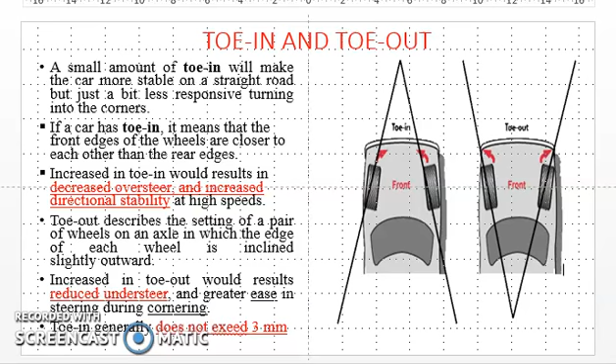In the previous video, we have seen what is caster, what is camber, and we have also seen kingpin inclination. Now we will see what is toe in and toe out. When you are looking from the top of the vehicle, you will find that the front wheels are closer as compared to the rear side of the wheel. Then this type of wheel position is called toe in.

Okay, we will see the definition which is written in the book. The toe in is the amount by which the front wheels are set closer together at the front than at the rear when the vehicle is stationary. Okay, how are you going to calculate this toe in? The outer distance, this distance divided by this distance. Okay, then it is called toe in.

Okay, so a small amount of toe in will make a car more stable on the road, but just a bit less responsive turning into corners, but this toe in will not help when turning a vehicle. Okay, and if the car has toe in, it means that the front edges of the wheels are closer to each other than the rear edges.

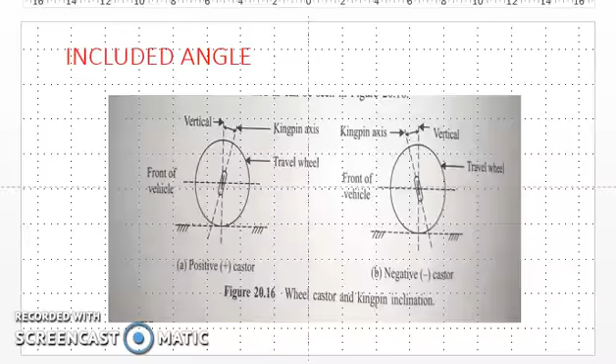This increase in toe out would result in reduced understeer and greater ease in steering during cornering. Okay, means during cornering, toe out will help. Okay, so this is about toe in and toe out. Now, just before going to the next point, once again we will see what we have learned during this lecture.

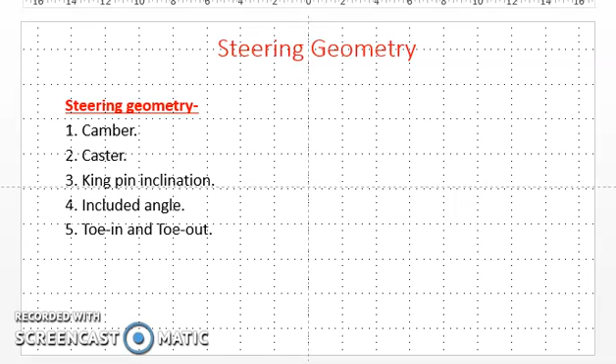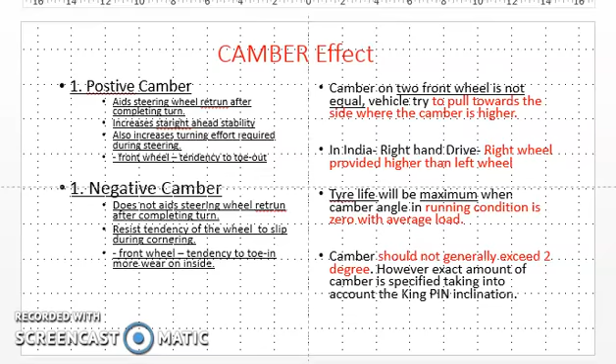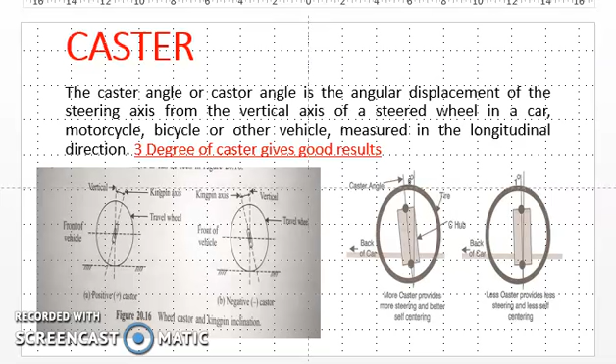We have started with steering ratio. What is steering ratio, how it helps, as well as we have seen different angles and definitions: camber, caster, kingpin inclination, included angle, toe in, toe out. We have seen camber, what is the effect of camber and how it increases the life of the tire. What is caster? It helps in road stability or increasing the performance of the vehicle.

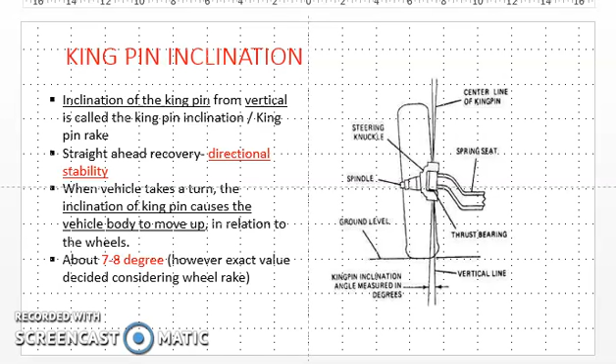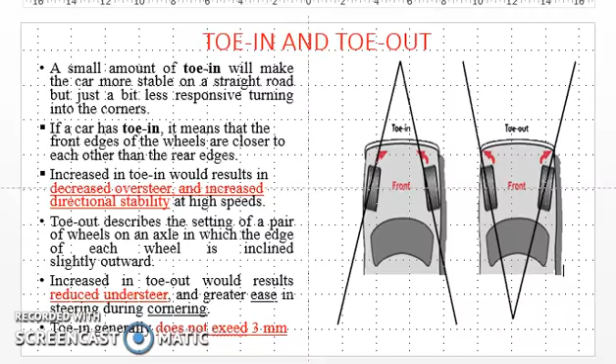We have seen positive caster, negative caster, as well as kingpin inclination, which helps straight ahead recovery or directional stability. Then we have seen toe in and toe out, what is toe in and toe out. And now we will see one of the important things, the conditions for correct steering.

Correct steering represents a condition in which all the four wheels of the vehicle undergo rolling motion without slipping while the vehicle is in motion. Means when the vehicle is on the road and moving, at that time it should not slip; it should undergo rolling motion without slipping. It should turn with correct steering.